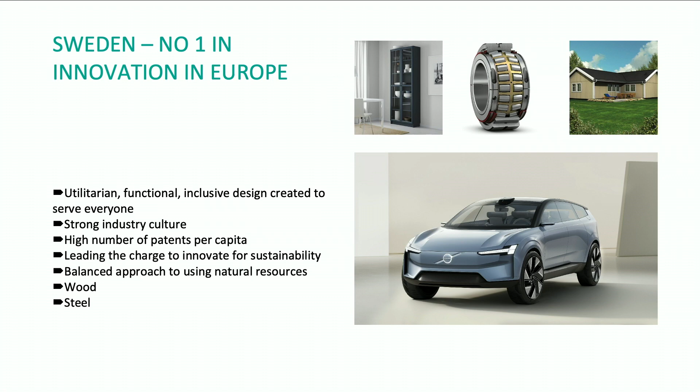And you probably recognize some of these names here. Volvo comes from us. IKEA is another big one that I know that you have around you. And all of these share the common notion that these are products made for the great many. They have a minimalistic design, and actually they're very producer friendly. So manufacturing is at the core of the design concepts, which I will also show you during this expose.

So next slide, please. So then I made a comparison for my US colleagues to understand what happens in the US versus Sweden. So the US was actually the inventor of dimensional lumber and machine-made nails, and also built the first balloon frame in 1833. So we, the Swedes, actually went over to the US because we had a really hard time with famine at the end of the 1800s. So we had 1/3 of our population migrating over to the US, learned about all the fancy stuff that happened there, brought it home. In the 1920s, we had the first house factories built. We had cookie cutter designs distributed.

And then in the meantime, the US invented the first modular home ever built just before the big recession in the 1930s. But we picked up on that idea in Sweden too, and used modular and panel factories to solve our housing crisis in the 60s. And that was post World War II, where most of Europe was in shatters and really needed a kind of large scale operation to solve the crisis. And both the US and Sweden had similar programs going.

So in the US, we had something called Operation Breakthrough, which resulted mostly in a lot of prototypes, but didn't really have a long-lasting effect on the industry. And right now, we're somewhere between 3 and 5% penetration for modular building technologies, including panelized and three-dimensional volumetric elements. Then on the Swedish side, the Million Homes program that took place during the 60s and 70s resulted in an industry with more than 70 factories, which is quite a lot if you consider we're only 10 million people.

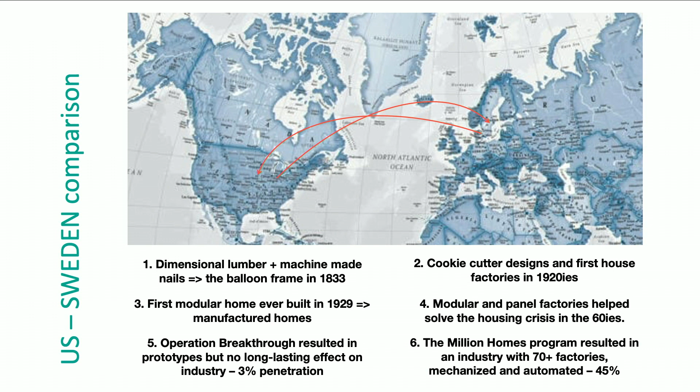Next one, please. So I belong to the second generation of industrialized builders, the kids of the ones who built our society in the 60s and 70s. I'm a structural engineer. I can do all sorts of FE analysis and software programming if you push me, but I won't now, because now I'm managing the technology and the process development here at VBC. The next one, please.

And I participated in this program, and I bring this up because it turns out to be formative. We had an industry academia cooperation program that carried on during a number of years. And this formed a really nice network. So you can take the next one, please.

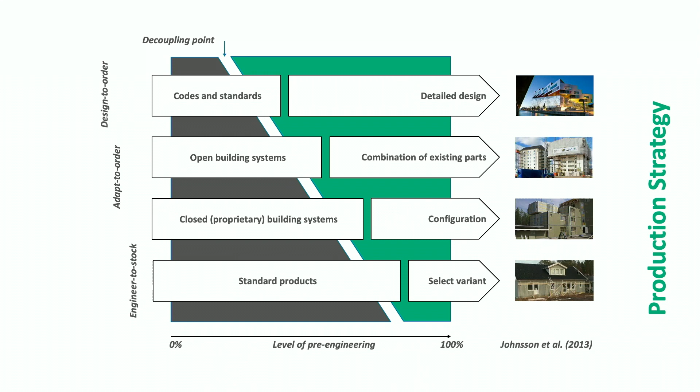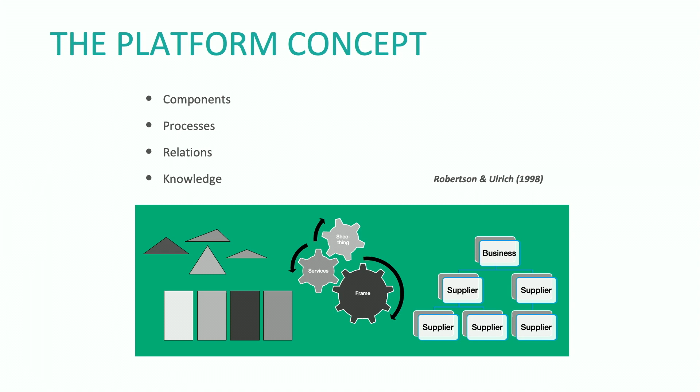But you can also infuse these types of ideas in more variation settings and have a lot of flexibility in an industrialized setup. Next, please. And platform is not only a technology, it's also the process knowledge and the relations that build up the platform. And that's why I'm in charge of not only the technology development, but also the process improvement that we are doing here at VBC. Next, please.

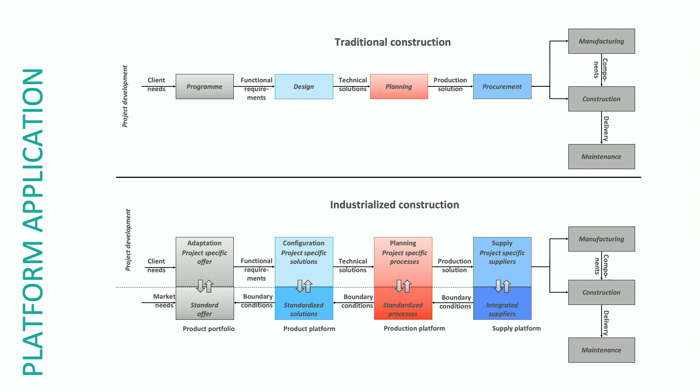And then if you're successful doing this implementation, your pre-definition will affect all the parts of your business model. It takes place in contract signing. It takes place in design. It takes place in planning and when you're purchasing and when you're having your relations. You try to standardize and make templates for all of these different parts of your operations to speed things up, but also to increase precision in what you're doing. Next, please.

So how can this work in reality? Next. This is where I learned most of what I'm talking about now. I was part of the team that started the Lindbäcks super factory that I believe Duncan said he visited. And we did this in 3 years. And it was built on the production principles of a one-piece flow. So you can kind of see that here on the picture.

On your far left are the modules, and the next one over is the material feed where you prep your kits. And then the large open aisle is for transportation and taking out the waste. And then on your right, you will have production of the panels to bring the modules together. So this is a setup. If you visit an automotive factory, for example, this is exactly what it would look like.

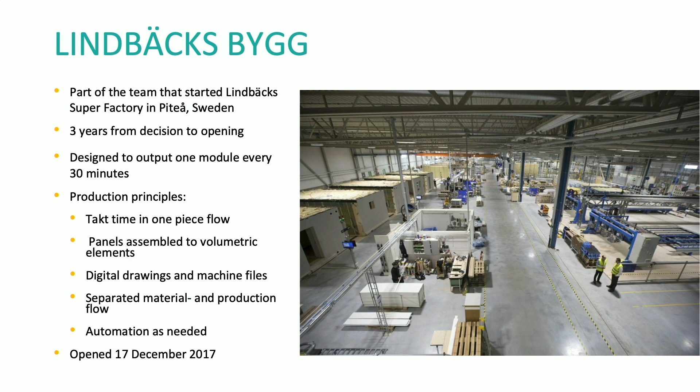Next page. And we moved that needle towards manufacturing, and you can see some of the kitting and pre-assemblies we were entertaining here on the left. And it became a process where we actually could move 2 factories ahead at the same time. Next, please.

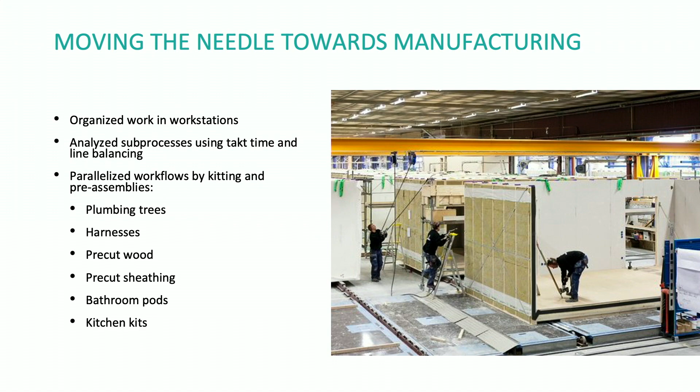And we also invented a few items or kits that weren't really made by us. So we had to create a whole factory to make our bathrooms, because there was just no way that our assembly line would be able to keep up with the speed that we needed. So this needed to be taken offline.

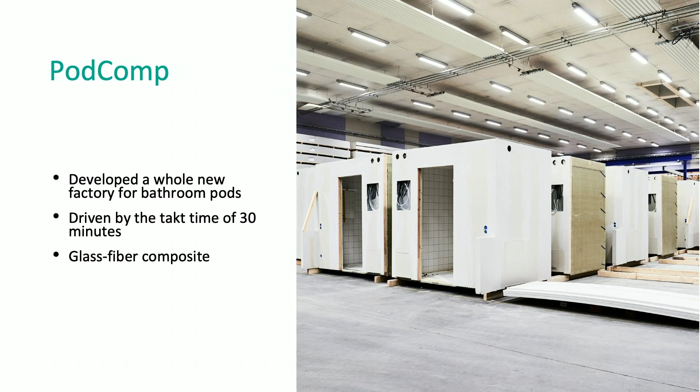And our entire factory was driven by the idea that we should have one module passing through the door every 30 minutes. And for that time, you can just do the bathrooms. This is what we use: the materials, machines, methods, and manpower. That's the only analysis tool we used for all of these 3 years. It's only 4, so it's very, very easy to remember.

Next, please. And our results: at our height, we produced a 37-minute takt time, so we didn't really reach our target, but we were pretty close. We were nominated for lean prizes, and we got a lot of visitors. We had guys and girls from all over the world come see us, and it was really a fun time to be part of this operation. Next, please.

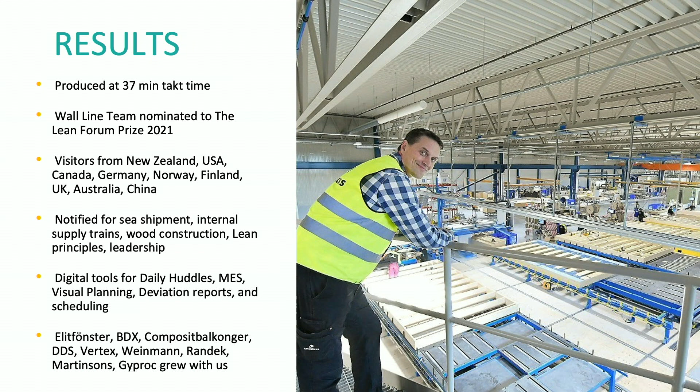And we do have to remember that construction exists in a context. Next. And push 3 times, please. And then when you're having a platform, it's very important that you're staying at par with your pricing towards your position in the market. So next, please.

So we had a little bit of a flexible platform, and that meant that our optimum was wider, and it kept us alive for at least enough to survive. Next, please. And this ecosystem that we have in Sweden is really world-class when it comes to machine suppliers, software development, engineering, and product development. I have a lot of people here who know what this is, and I have capitalized on that when I then transitioned. Next, please.

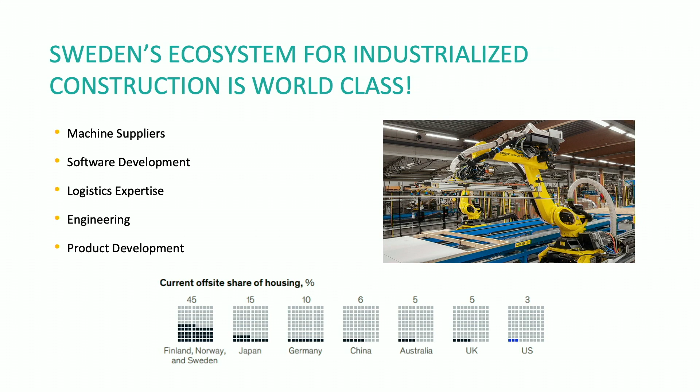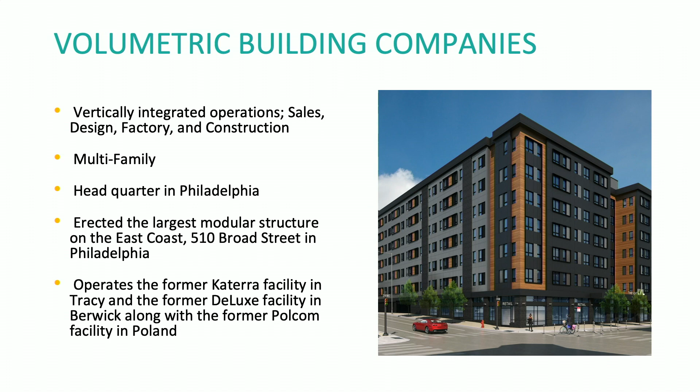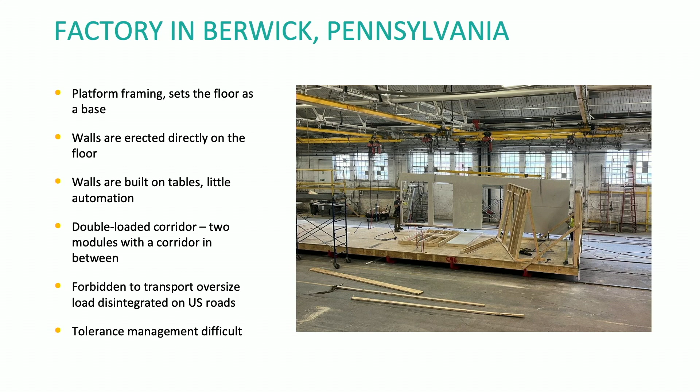To Volumetric Building Companies, which is, to no one's surprise, another vertically integrated operation with sales, design, factory and construction that also produces multi-family using modular techniques. And we have a factory in Berwick, Pennsylvania, and we have another one in Tracy. So next, please. And the factory in Tracy is the one that has the most automation. And what we did was actually use the knowledge we had then and bring in Swedish and Finnish machine suppliers.

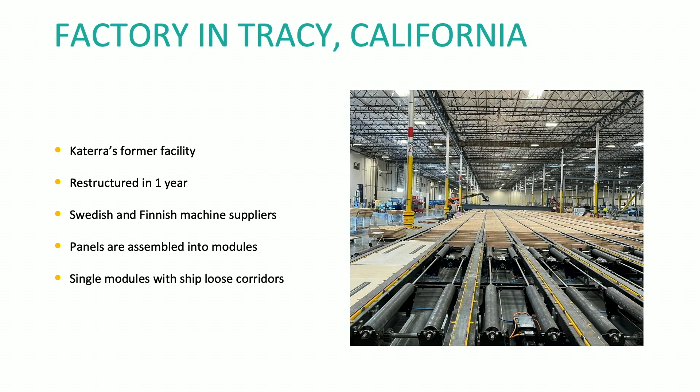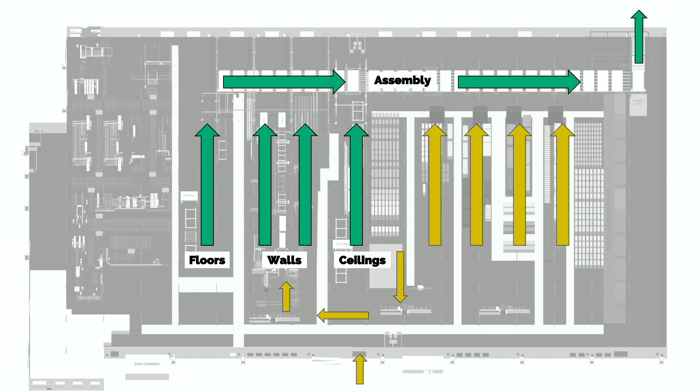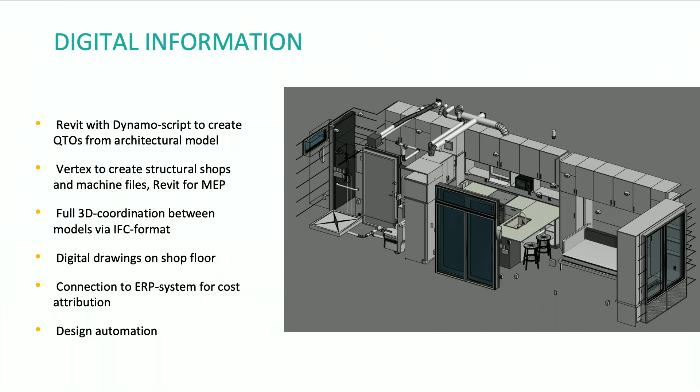And of course, we feed this with digital information. So we use a combination of Revit and Vertex to create our information. And I appreciate the former speaker talking about scripting, because that's something that we need to do as well. We operate with full 3D coordination between the different models, and we are able to provide digital drawings to the shop floor without a step in between where we print it.